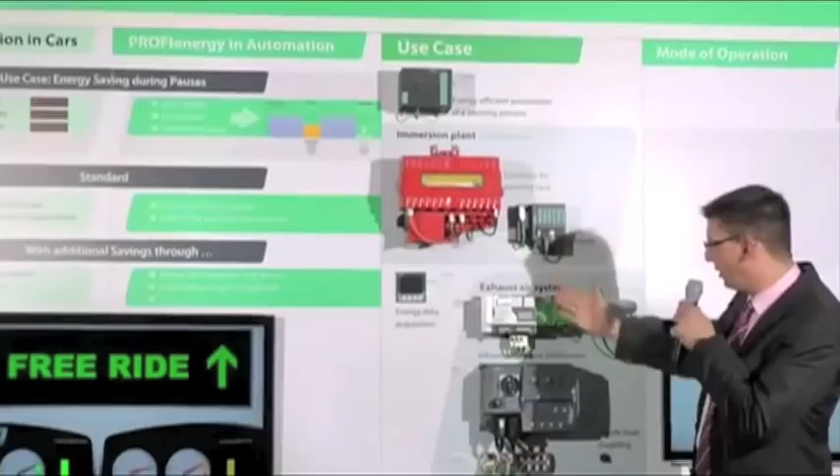Energy saving is very popular these days. PI has developed an energy saving profile called PROFIenergy some time ago. This profile is already implemented in lots of new products from different device vendors. To explain the benefits and use cases of PROFIenergy in more detail, we brought a demo system, a motor racing circuit, with us.

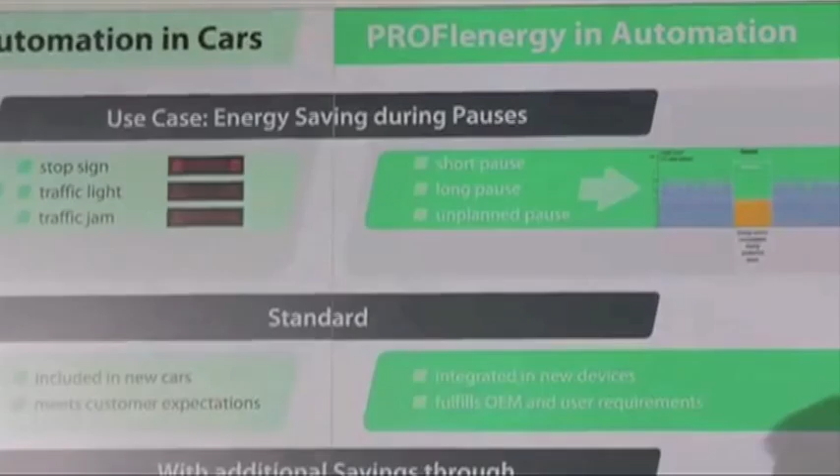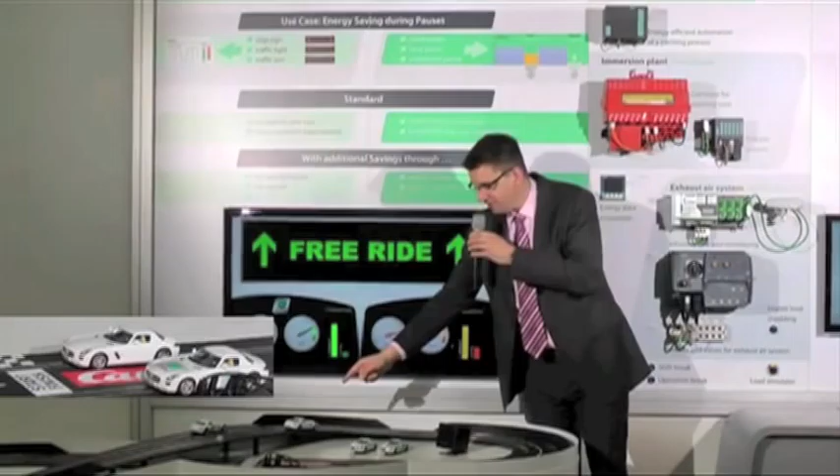Different use cases are important. In the car business, for example, we have a stop sign which can be compared to a short pause in automation business. A red traffic light can be compared to a long pause, and a traffic jam is an unplanned pause in automation business, meaning you have some trouble. We brought two different cars with us: one car is without energy saving mode, the other is with energy saving mode, meaning with start-stop functionality included. Let's start the race.

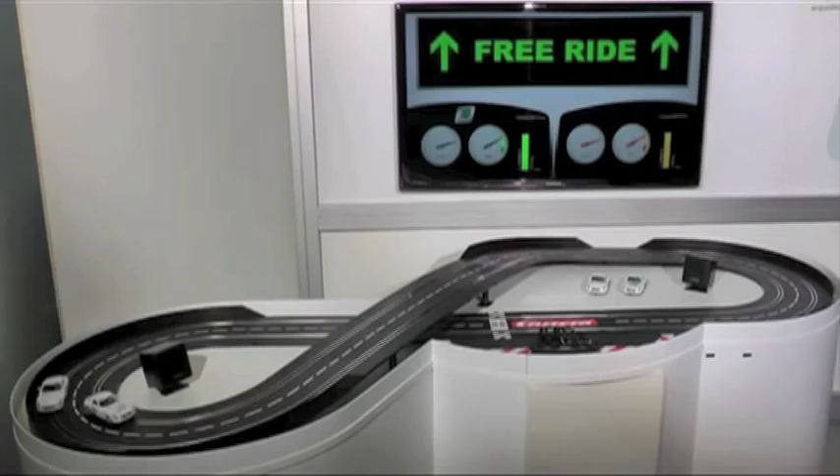Use case number 1 is the red traffic light, which is a long pause in automation production. The engine speed of the car with start-stop function is 0 in the break, and the same is with the energy consumption.

Use case number 2 is traffic jam, an unplanned pause in automation. The same happens: start-stop means engine speed 0, energy consumption 0.

Use case number 3, stop sign, short pause in automation. Again, engine speed 0, energy consumption 0.

The overall result of the race is a difference between the cars in energy consumption: orange without start-stop function, green with start-stop function. So this is the potential saving. As you can see, a lot of energy can be saved with very simple mechanisms in cars as well as in automation. Thank you very much for your attention, and I wish you good luck for energy saving in your production.

What is the Diamond difference? It's what lifted the Wright brothers off the ground. It's what drove the Model T off the production line. It's what turned ideas into an industrial revolution. The Diamond difference is experience you can trust, unparalleled quality, and unrivaled performance.

For over 120 years, Diamond Chain's proven manufacturing process has delivered a high-performance drive chain. At the core of each chain is a proprietary metallurgical process that begins with careful selection of raw materials. Stringent material property specifications eliminate impurities that affect tensile strength and material fatigue. Inbound materials receive an 8-point inspection prior to production to ensure that the material grade, carbon and alloy content meet strict quality standards. This attention to material quality enables Diamond Chain to hold tighter tolerances throughout the manufacturing process. The result is unsurpassed consistency in the components that form the foundation for each chain.

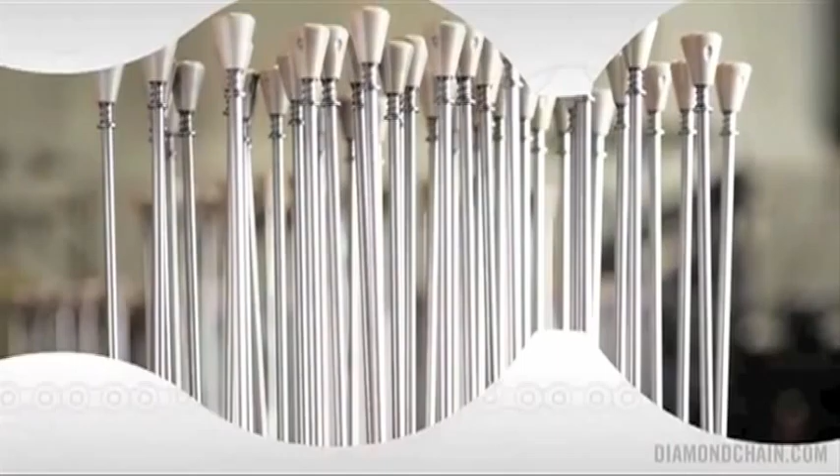Diamond Chain manufactures its drive chain to exacting dimensional specifications. A rigorous 71-point quality control system ensures that only qualified components reach the assembly stage. Bushings are manufactured with consistently uniform wall thickness. Plates receive a multi-stage pitch hole process to ensure maximum surface contact area. Pins receive precision grinding for a consistent fit. Rollers are extruded with near perfect roundness.

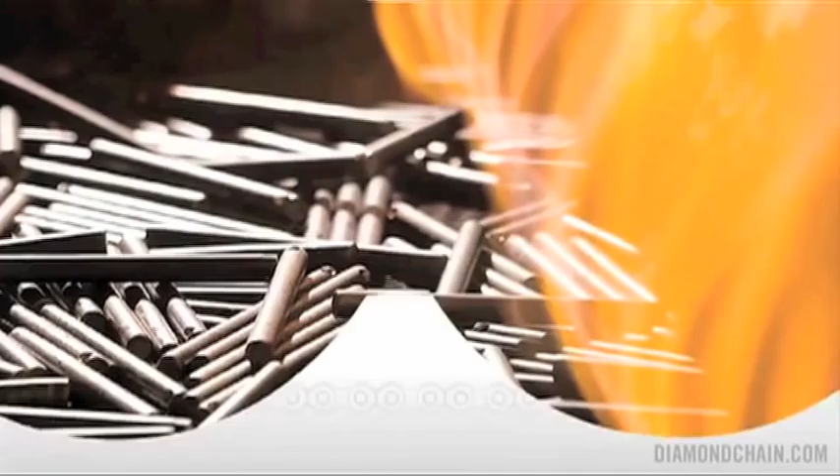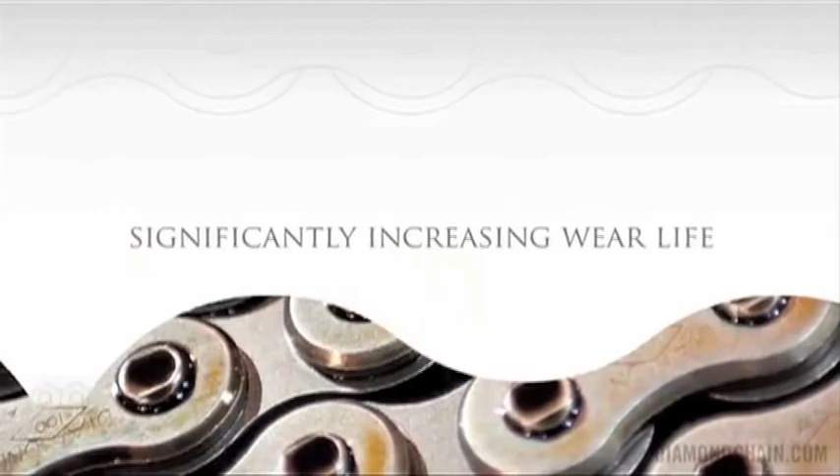Critical to the Diamond Chain assembly process are the heat treatment, shot peening, and hot dip lubrication processes. Diamond Chain uses a time-tested heat treatment process to ensure consistent case hardening that increases wear life. The shot peening process is applied with even coverage across components to strengthen materials and minimize fatigue. The manufacturing process finishes with a hot dip lubrication application that covers the entire chain, inside and out, significantly increasing wear life. As an additional measure, special additives enhance corrosion protection.

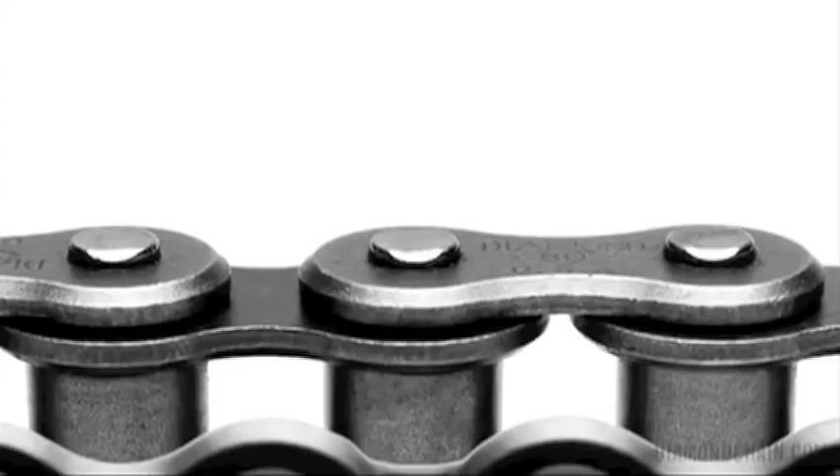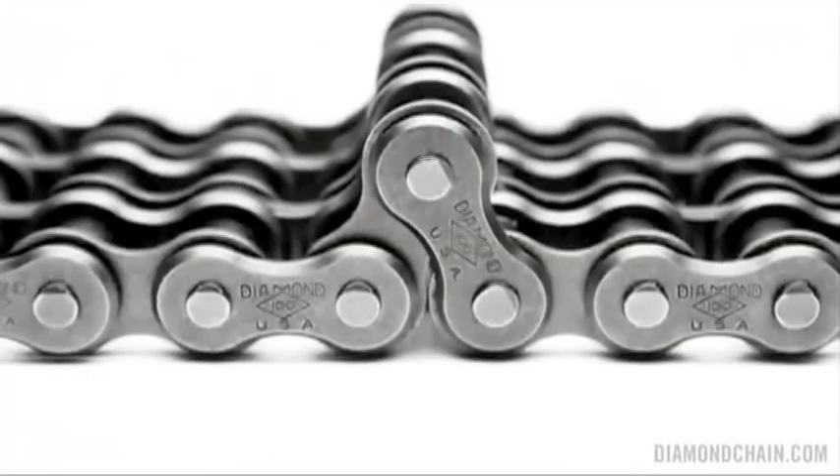The final result is the Diamond Standard, to which all other drive chains are compared. Oliver Wendell Holmes wrote that every calling is great when greatly pursued. For Diamond Chain, that calling is to create the world's most trusted drive chain. Diamond Chain's 120-year history is forged into each and every chain, and each product comes with a class-leading warranty. When it's time to choose a drive chain, choose experience, choose quality, and choose performance. Choose the Diamond Difference.

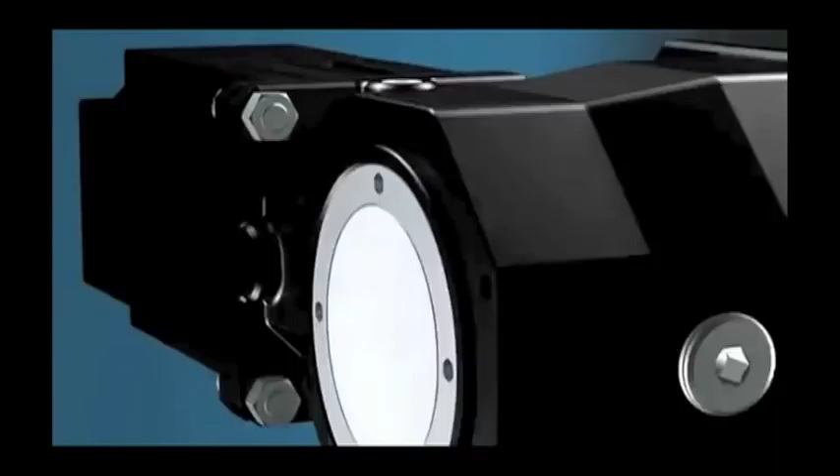Stober announces the extremely low noise geared motors for high-performance servo drives.

The output shaft is available as a solid shaft, as a hollow shaft with shrink disc, or as a flange hollow shaft.

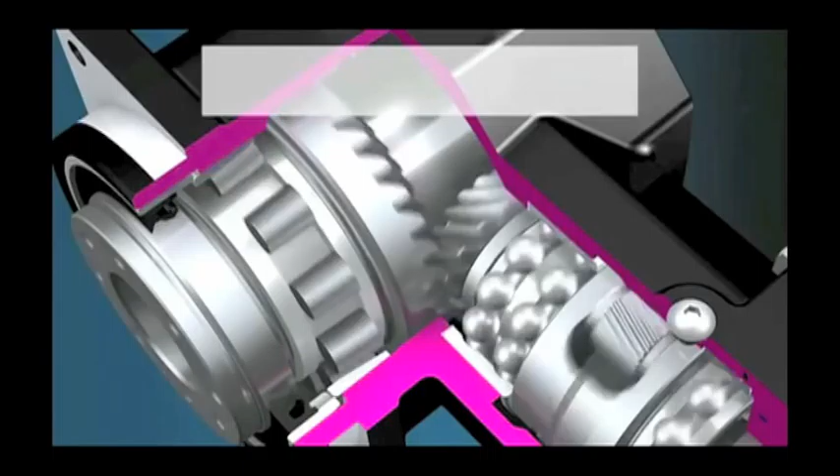This right-angle servo geared motor is predestined for high dynamic performance or for continuous operation at high speeds. The compact solution, SMS right-angle servo geared motor KS.

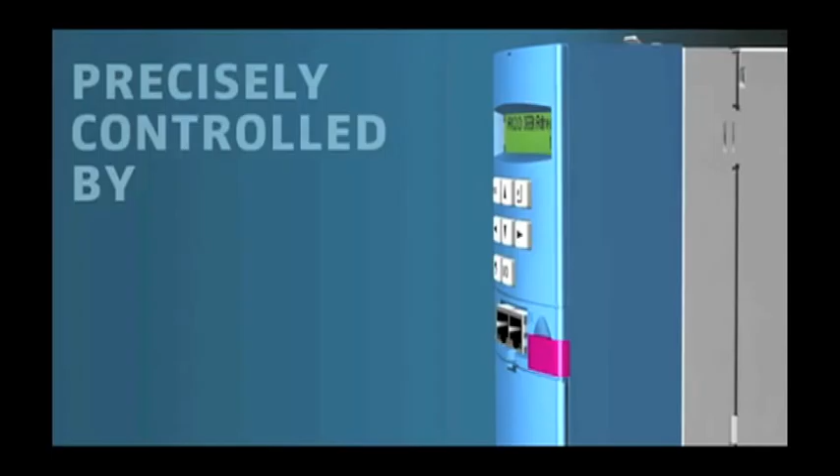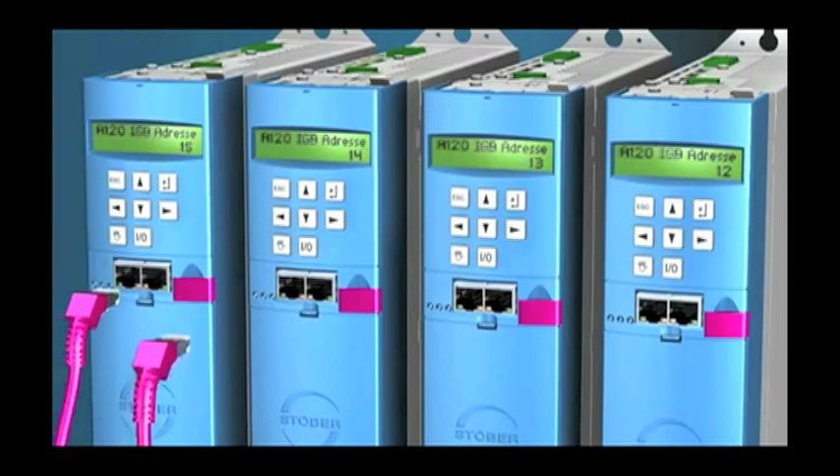Precisely controlled by the innovative Posidyn SDS servo inverters, with integrated EtherCAT bus. Synchronization of the drives to the microsecond via the EtherCAT motion bus. The EtherCAT network is also used for remote maintenance via the internet. The secure communication sets new standards in automation technology.

Dream drive for high-speed users with convenient Positool user software for configuration, commissioning, diagnostics and communication.